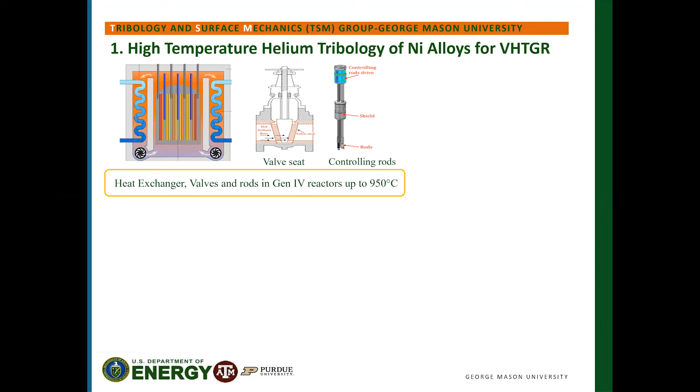Let me briefly talk about some of our current research projects. One focuses on high temperature helium tribology of nickel alloys for high temperature gas cooled reactors. Department of Energy seeks to deploy its Generation 4 reactors with near zero carbon emission around 2035, where these advanced reactors will operate at very high temperatures near 1000 C, which is very challenging for surface reliability and performance of their components.

Our work in particular involves both experiments and numerical simulations across scales. For example, we perform nano indentation, and also macro scale testing like friction and wear, trying to come up with predictive design formulas and recommendations for reactors licensing.

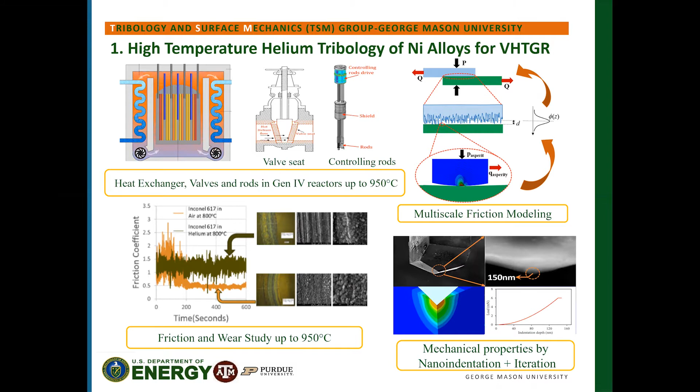On the second project, we use laser shock peening to enhance mechanical property of advanced alloys. Laser shock peening uses laser to generate supersonic shock waves into the material and creates enhanced microstructures with high compressive residual stresses.

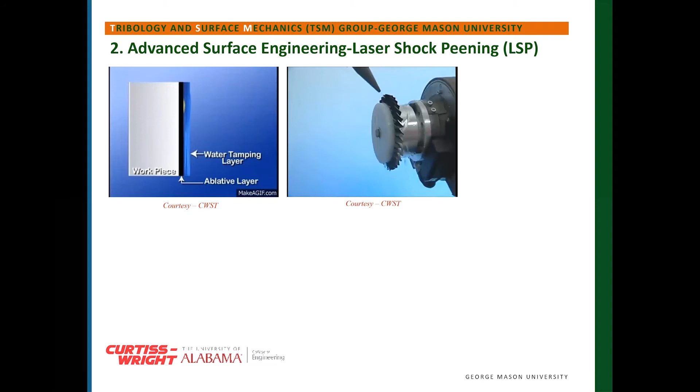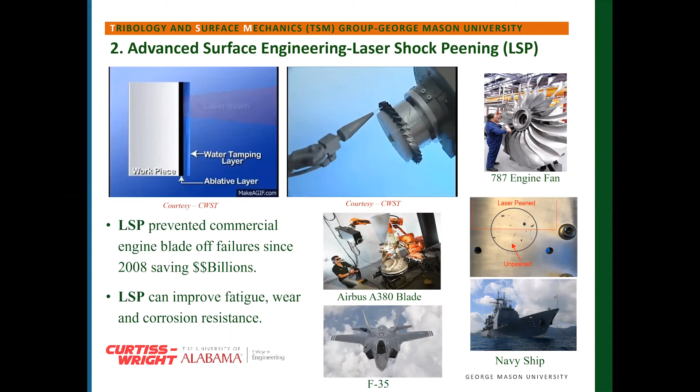Since its deployment, laser shock peening has saved billions of dollars, as it can significantly increase fatigue, wear, and corrosion resistance in lots of components, including aerospace and naval applications.

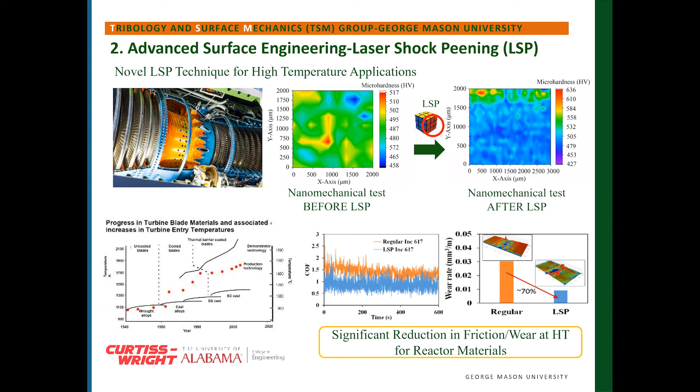In particular, here we currently study laser shock peening to understand the stability of the phenomena at high temperatures. Working with our collaborators, we develop novel hybrid thermal engineering and laser peening to increase fatigue and wear resistance at elevated temperatures. Our preliminary results showed a 70% reduction in friction and wear for nickel alloys at 800 C using this novel hybrid technique.

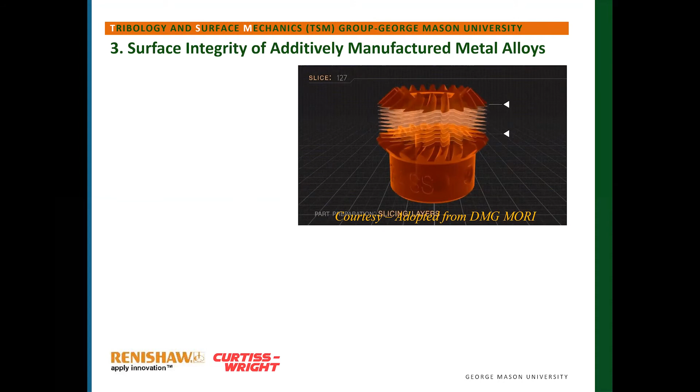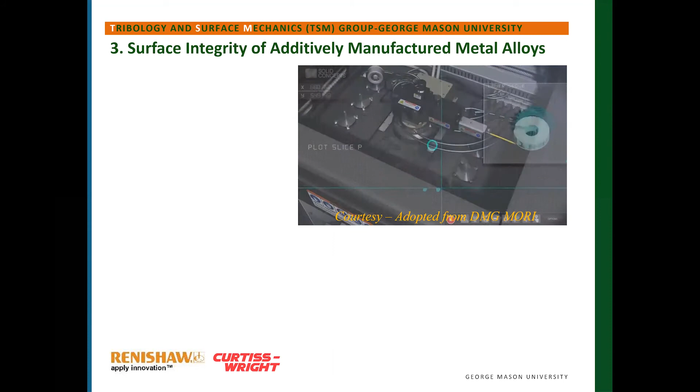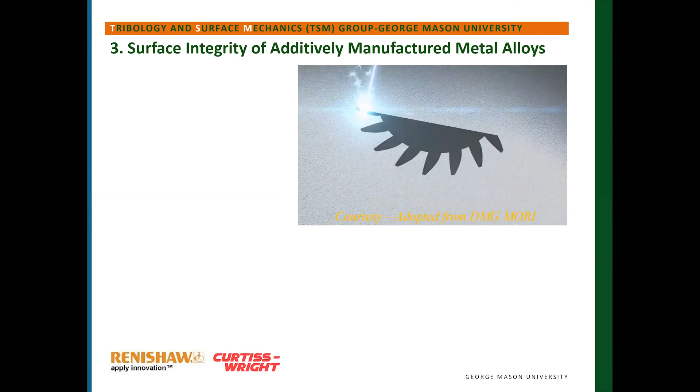In another project, we investigate surface integrity of additively manufactured or 3D printed metals. These samples are made using direct metal laser sintering technique. As you can see in the animation, the samples are made of powders that are melted layer by layer through a laser beam. This technique can make prototyping super easy and also create complex shapes.

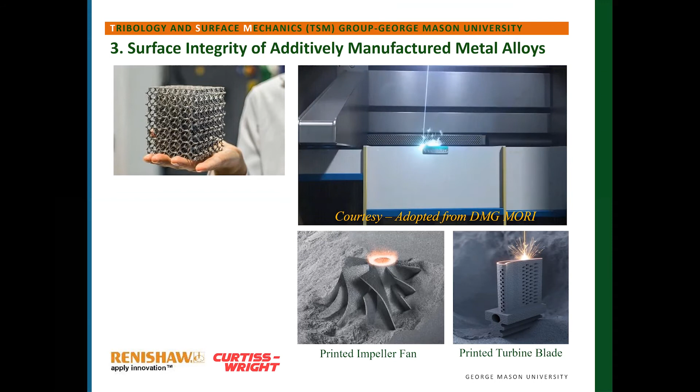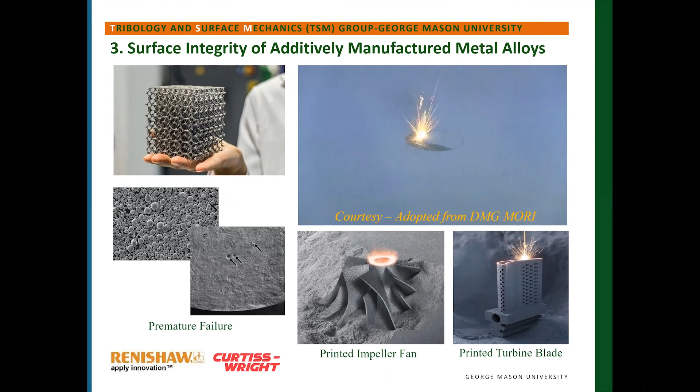For example, a turbine blade with advanced cooling channels can be made here. However, due to the nature of the process, the mechanical and surface strength are lower compared to the wrought counterparts.

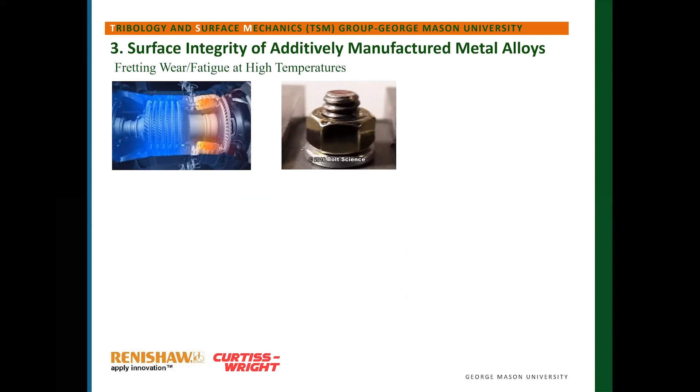In many applications, including aerospace and other applications, mechanical components are susceptible to a form of contact damage called fretting, which can result in drastic failure in the component. This makes the adoption of additive manufacturing technique challenging, especially for mission critical components like airplane turbine blades.

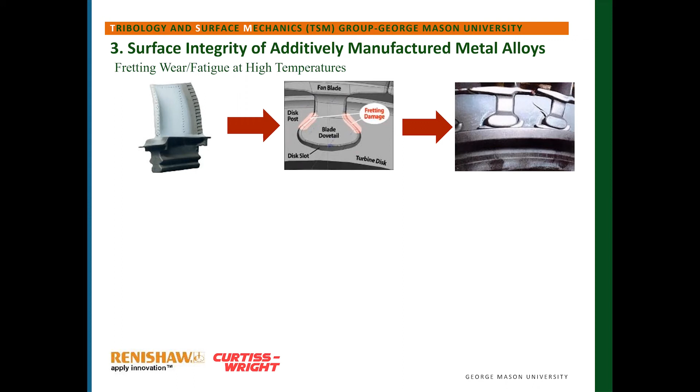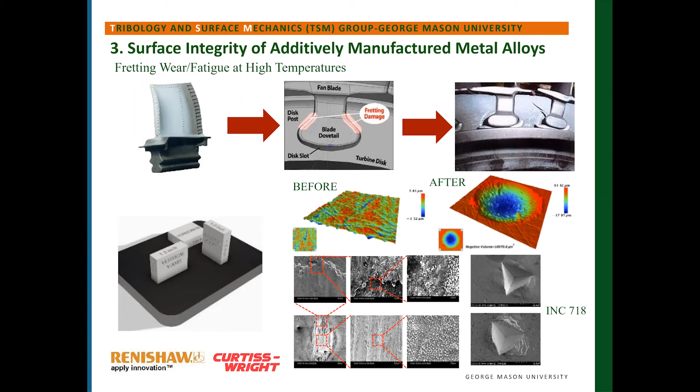One of our concentrations here is currently on studying multi-scale, high temperature fretting, wear, and fatigue of super alloys made through metal 3D printing. I would like also to mention a couple of instruments that we currently have in the lab.

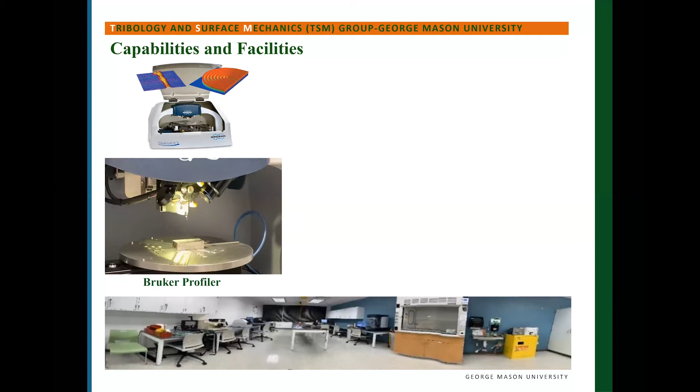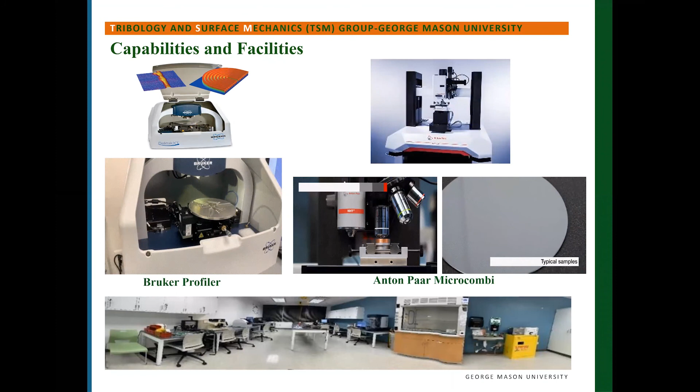We have a profilometer to measure surface topography with high resolution. We also have a multi-scale indenter and scratch instrument that can precisely measure local mechanical properties down to submicron.

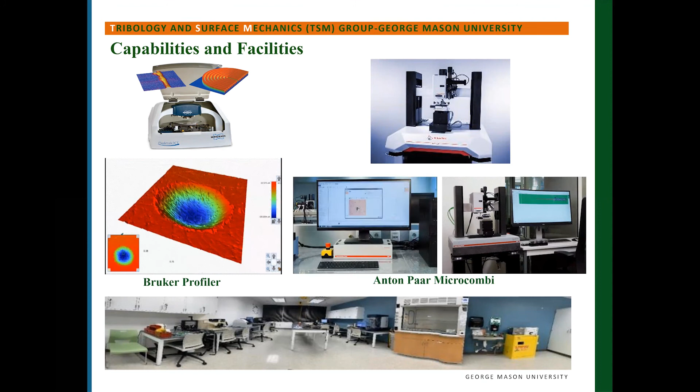At meso to macro scale, we have an advanced tribometer for measuring friction and wear in several configurations and up to 1000 C temperature.

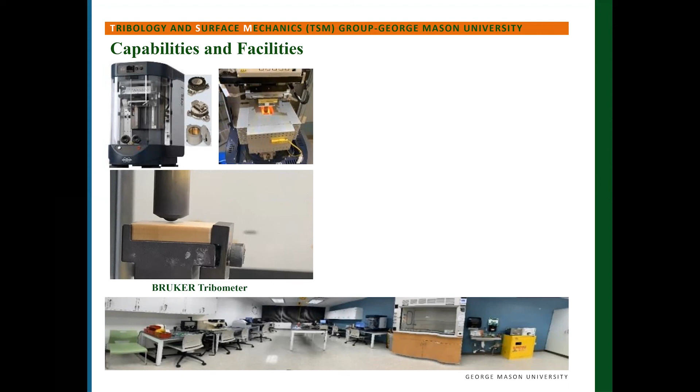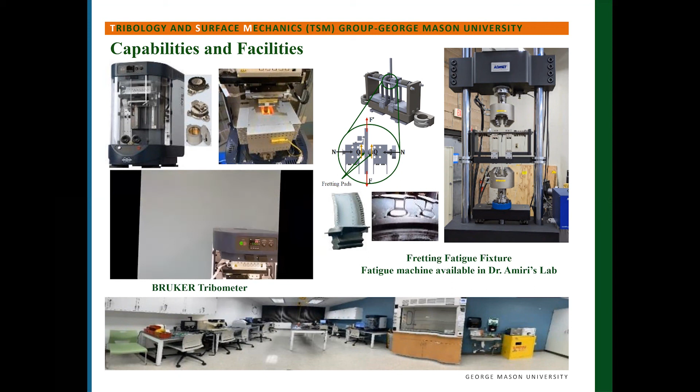In addition, using the fatigue machine in Dr. Amiri's lab, we recently designed a special fixture to simulate high temperature fretting fatigue of mechanical components.